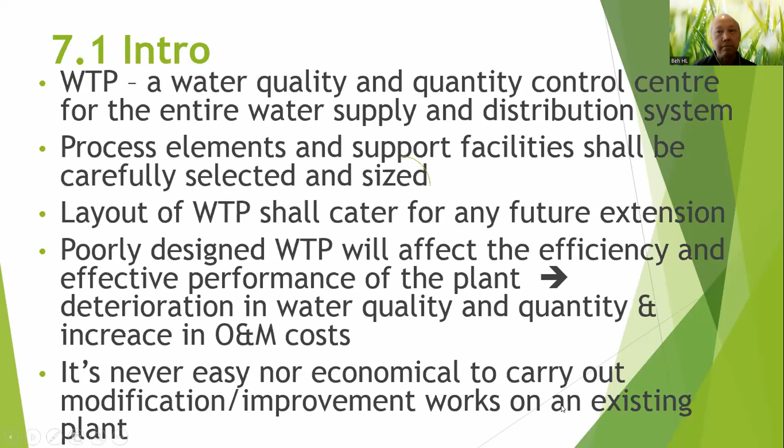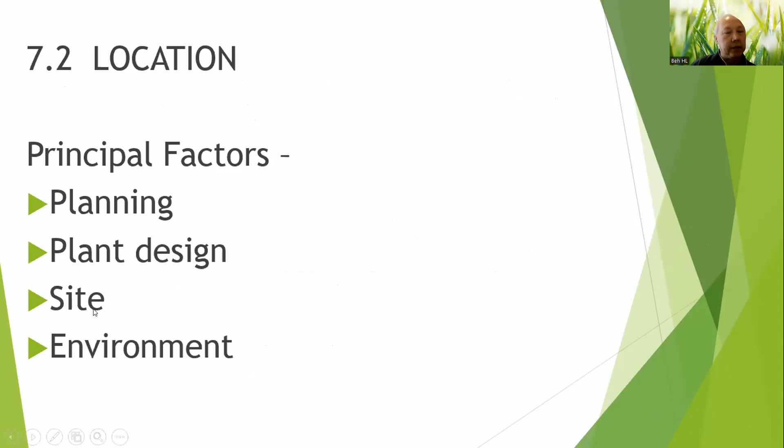Location of the treatment plant. During planning, these are the few principal factors we need to take into consideration when locating the treatment plant: the planning of the plant design, site selection, and the environmental factors.

On the planning side, this is a significant factor. The location should cater for the present and future demands, as I mentioned, and take into account the possible growth of the service area, which is the delivery area, and the potential deterioration of the source quality. Sometimes the raw water source could be in a region of fast development, and there could be a potential deterioration of the water quality. So in our planning, we have to allow for possible addition of future treatment processes to cater for that.

In trying to locate the treatment plant, we should look at the master plan of that area, if one is available. If there's no master plan, then we have to discuss with the local authorities, looking at any new application for developments, and discuss with the Ministry of Environment and other stakeholders as well.

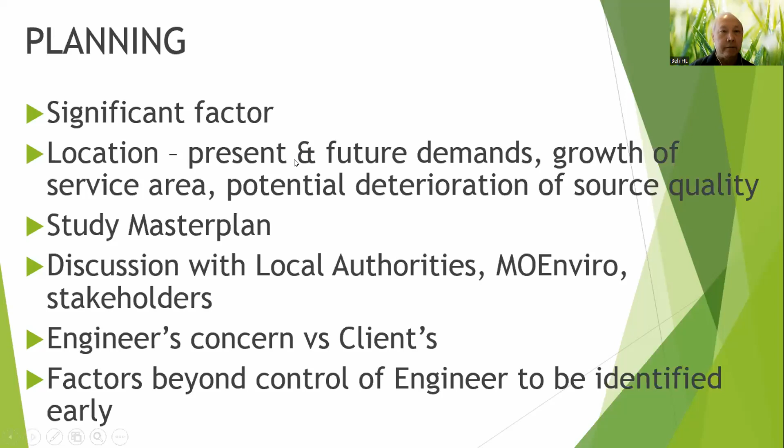The plant design and land selection has to consider various space needs. That means not only the layout of the treatment plant, but also during construction, the movement of construction traffic, storage of building materials, and so on. Also during operation of the treatment plant, the various space needs, like the transport of chemicals, and also the environmental requirements to be met.

The next thing is to prepare a preliminary layout. I remember those days we didn't have AutoCAD. I used to cut out Manila card - colored Manila card to the approximate size of a process unit, approximate size of admin building, chemical building, etc., and then try and lay them out to roughly get a feel of the size required.

We have to evaluate the potential site, looking at the topo map, existing constraints, etc. All these have to be taken into consideration. As I said before, the preliminary design has to include present and future requirements, to see whether any extension is required. And we have to bear in mind to include access roads, setbacks, and any possible earthwork, cut and fill, landscaping, etc.

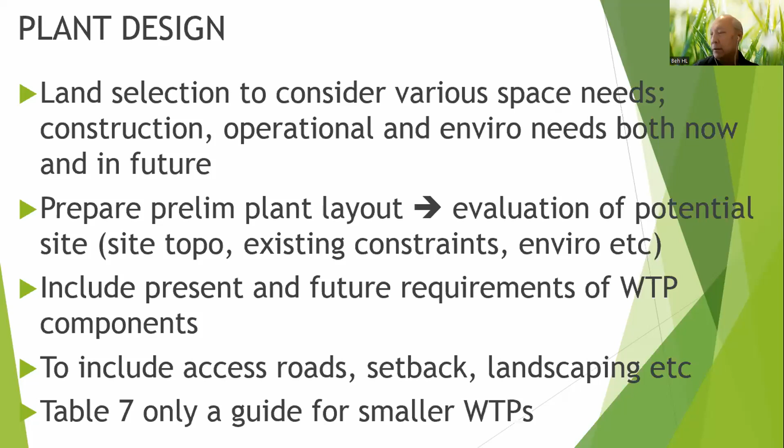It's my hope that somebody in the design committee can have a look at the latest development of big treatment plants and see what land area is required for those large plants, and come up with a guide that covers bigger treatment plants.

Site selection. There are a few factors to be considered, I think 7 or 8 factors, when we want to select a greenfield site, meaning a new site.

The relation to intake and service area: if you have your raw water source and your service area, the treatment plant can be located near the river or dam, near the service area, or somewhere in between. Ideally we prefer a shorter raw water main because it requires much more maintenance, due to slime growth, silt deposition, mussel formation, etc., requiring pigging and chlorination to disinfect if necessary. So preferably we locate the treatment plant nearer the raw water source and have a longer treated water main.

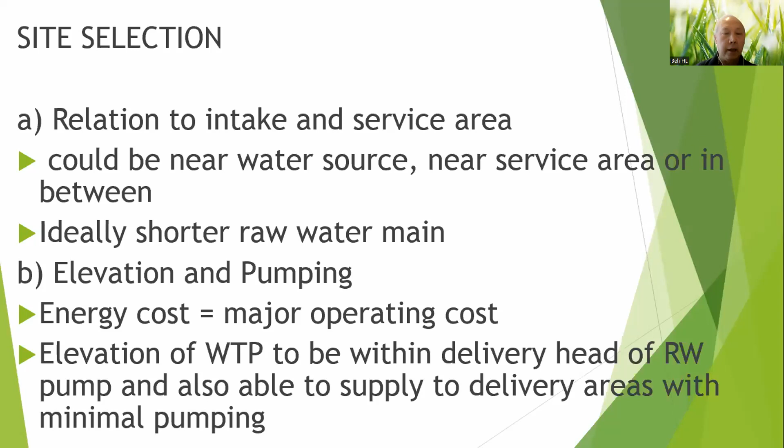The next point is elevation and pumping, because energy cost is a major operating cost. The elevation of the treatment plant has to be within the delivery head of the raw water pump, since for river water sources we normally use a submersible pump with limited head. The plant's location should also supply the service areas with minimal pumping - ideally gravity flow is best, but if not, minimal pumping is required.

Site topography: we should select a location where the slope is ideally between 2 to 8%, to suit the hydraulic profile of the treatment plant, since water flows from high point to low point. If the site is steep with a long slope, that requires extensive cut and fill to fit in the treatment plant. On the other hand, if it's very flat land, it also requires some cutting and filling to suit the hydraulic profile.

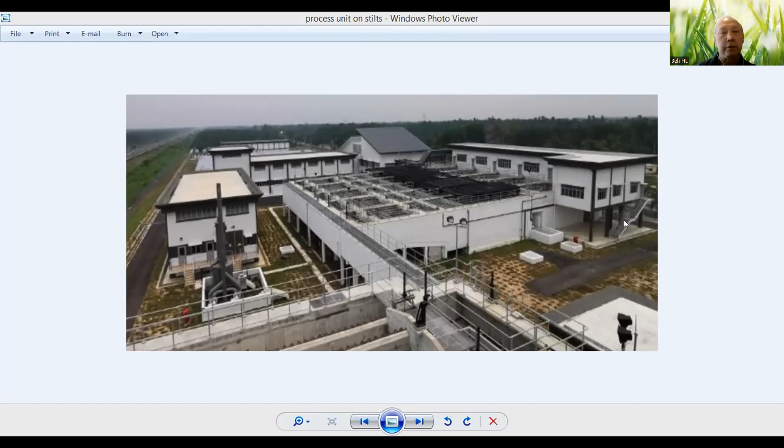Geotechnical is another important aspect to be looked into. Normally we will carry out some form of soil investigation and drilling once the site has been selected, to understand the subsoil properties, because any presence of rock will affect the cost of construction, or low bearing capacity soil will increase piling cost. High water table will require dewatering. All these increase construction cost, so it's prudent to carry out soil investigation on selected sites. This money cannot be saved.

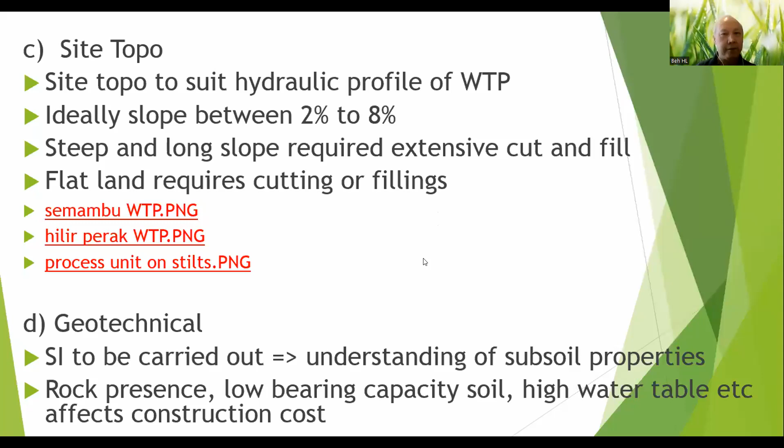Another factor to be considered is the possibility of flood. For a treatment plant, it may not be an issue if you select a high ground, but it still has to be checked to make sure it's above the 1 in 100-year flood level. If we don't have hydrological records, we can speak to locals nearby and learn from their experience where the maximum flood level is, or from visual inspection, look for watermarks to know the maximum level experienced.

Access is another essential consideration, because you don't want the treatment plant site deep in no man's land requiring long access to be constructed. If possible, it should be preferably near existing main roads so that construction traffic is more feasible. It should be accessible for construction traffic of workmen, materials, and equipment, and after completion, during operation, accessible for operating staff, trucks supplying chemicals, and treated residuals moving out of the plant. So when we select a site, we should look at the accessibility.

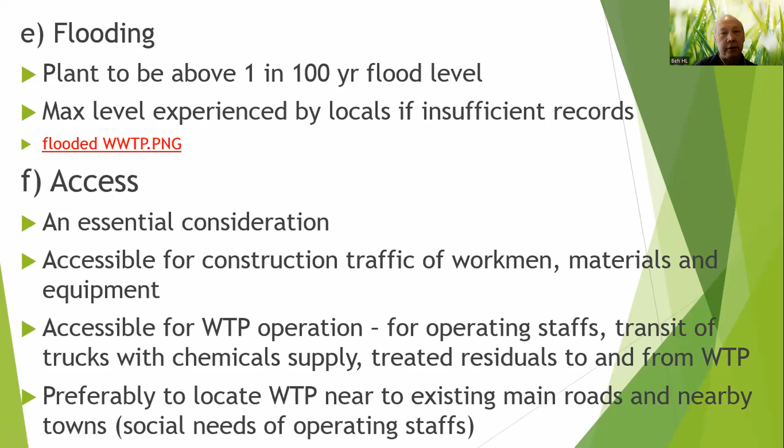Not only that, the plant should preferably be near an existing township also, so that the social needs of the operating staff, like schooling and rubbish collection, can be met.

Next factor to be considered is power supply and telecommunications. We should try to locate the treatment plant where power supply and telecommunications are available. For power supply, preferably we would need dual power supply sources. We would talk to the TNB, or in Sarawak and Sabah the electricity board, about tapping from two sources, so that if one side is down, they can still supply power from the second intake. Otherwise, if it's only a single source, we should look at generator backup, installing a diesel generator. We also need to decide how long the power outage will be, as promised by the power authority, so the generator size can be accordingly sized, whether to power the whole plant or only essential services.

Land availability: once all the requirements for a site have been established, we should check the availability of land and do a preliminary survey on the topo map. The potential site has to be inspected on ground, and we should select a site with the least land acquisition problems and costs. We should avoid land with multiple owners, because some land could have 5 or 10 owners, and if one or two refuse to sell, you have a problem with the land acquisition.

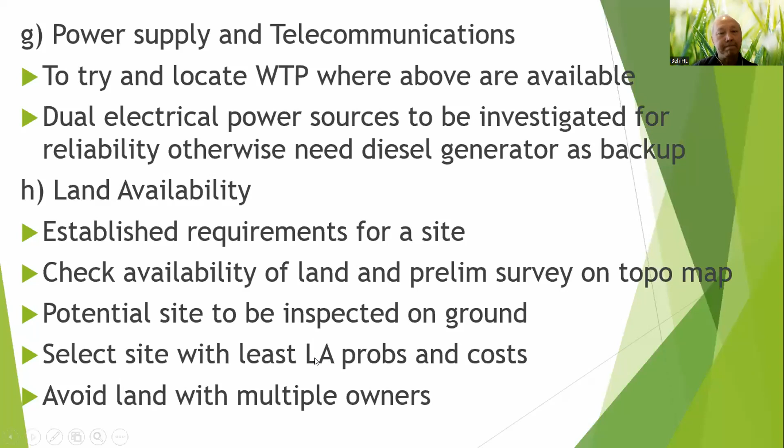Environmental factor: the EIA has to be carried out for the proposed treatment plant site, depending on the land size. DOE has certain requirements - below a certain size, an EIA report may not be necessary, but if it exceeds a certain size, we have to conduct an EIA study. There are various factors to consider, and I'll only pick the main points. During construction, we consider the noise of construction traffic, dust, and traffic movement. After completion, during operation, there will be noise generated from pumps, dust, and odor from chemicals.

We should look into the possible leak of chemicals, what dangers it can pose, and what contingency plans exist to contain them. The other thing to look at is the discharge of wastewater and residues from the plant. All these have to be included in the EIA report.

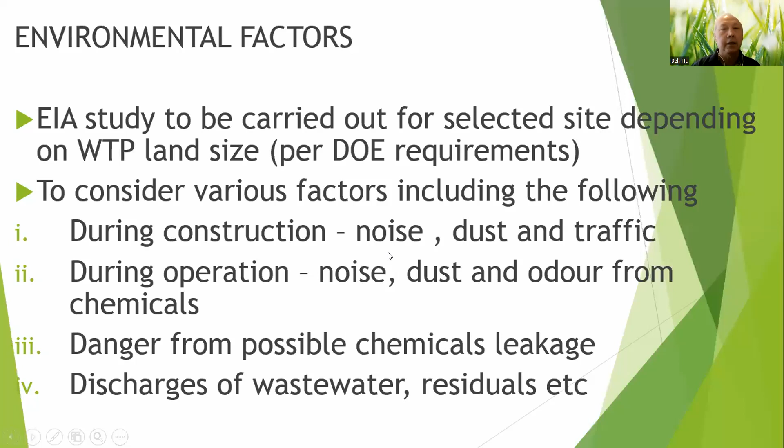The plant layout. In the plant layout, we should define the specific process elements, that means the treatment process units and all the other support facilities required.

Layout of the plant should be as simple as possible, with the minimal number of process units, but yet still able to provide sufficient standby capacity. That means you don't want to have too many clarifiers or filters than necessary.

So a typical treatment plant comprises the process units, which are the aerator if required, mixing chamber, flocculation channel, clarifiers, filters, etc. And then you have the clear water tank and your treated water pumping station. You have to consider storage for the wash water, required for backwashing of filters. And of course, you have the administration building, chemical storage buildings, and other M&E like electrical buildings where your incomer is, and your control centers, etc.

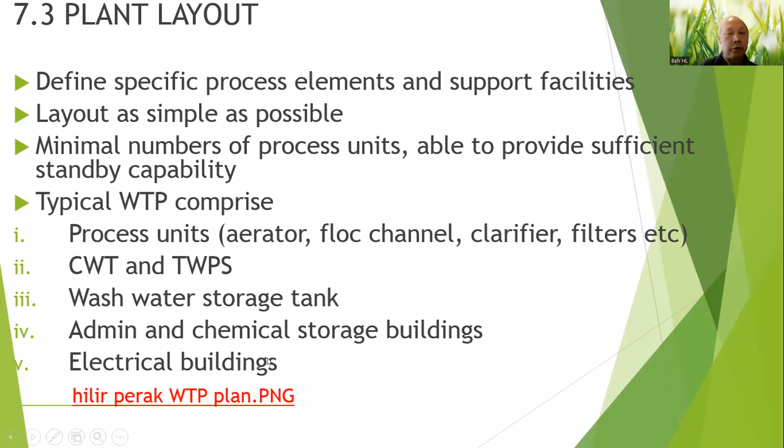So let me share this screen.

Arrangement of treatment facilities. In the treatment plant, it typically comprises a series of hydraulic structures, as I mentioned just now, all the hydraulic structures, and water flow lines or connection pipes, the chemical lines, chemical dosing lines, and your chemical preparation and dosing facilities. You have your M&E equipment for plant operation like pumping facilities, the electrical networks, instrumentation and SCADA in your control center.

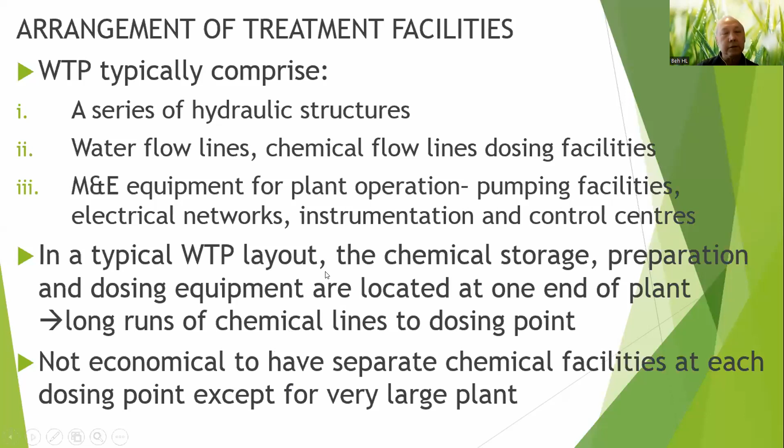So basic considerations for the plant layout are hydraulic design and connections. We should aim for gravity flow. I think mostly in the treatment plant, from the inlet to the clear water tank is all gravity flow, and all connections between the treatment units shall be direct and as short as possible to minimize head loss.

And once your hydraulic section has been determined, all the components of the treatment plant can be located within the site. Select your ground level so that you don't sacrifice any aesthetic requirements with minimal cut and fill. As I mentioned just now, if you have a flat site, then it requires modifications by some cutting and filling.

And for cut slopes, a rule of thumb is normally 1 to 1.5, and for fill slope, this is 1:2. These are just rules of thumb, and still need to be confirmed by the SI result.

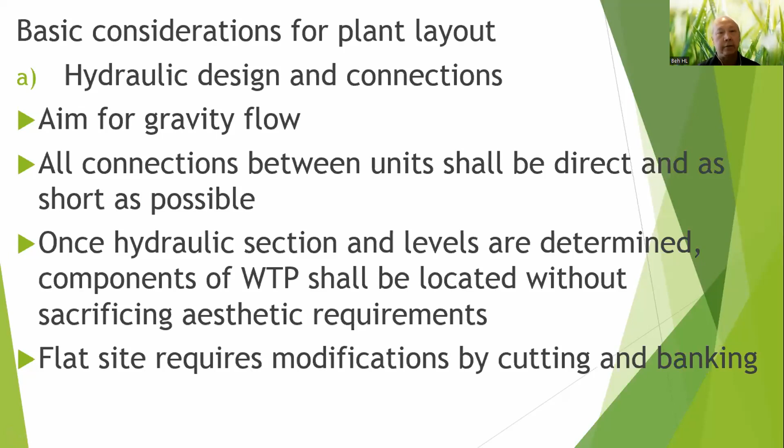Inspection, operation, and maintenance. We should aim for easy operation and O&M for the operators. When you plan out the treatment plant, you should have efficient operator movement.

That means areas requiring more attention, like your chemical preparation and dosing systems, your filters where you need to do backwashing, all these have to be located as close to each other as possible, and also near to the operation building.

If these areas are too far from the operation building, sometimes operators may be reluctant to go to the place often enough. So that may affect the operation.

The other considerations, there's a list of other considerations in the guidebook, but I think about 9 of them. I'll summarize them here to say that adequate access has to be provided. It means the walkway should be wide enough. You don't want too narrow a walkway.

There should be easy access from the ground to the top of the structures, like from ground level to the top of your clarifiers or filters. There should be covered walkways where possible, and external concrete steps or galvanized mild-steel ladders. I think now operators prefer concrete steps over ladders.

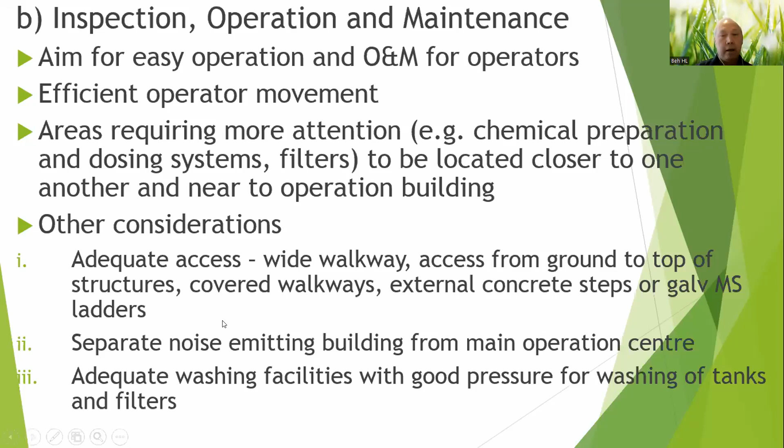Future extension. We have to consider the need for future extension, as I mentioned earlier. To meet future demand, we have to allow space for future extension if possible.

We also need to allocate space for additional treatment processes if we anticipate the raw water quality deteriorating in the near future. For example, if you foresee an increase in iron and manganese levels, we may have to allow for additional dosing of potassium permanganate or other chemicals to address this problem.

Chemical dosing lines should be as short as possible to minimize clogging. But as said previously, this is sometimes not possible as the chemical buildings are located at the other end of all the process units, so some lines, like to the aerator, could be quite long. We should design the route to be as straightforward as possible to minimize clogging.

The dosing lines should be arranged neatly in the trench or on trays. If it's in the building, it can be on trays; outside, between process units, it should be in a properly covered trench, and they should be properly marked or tagged for easy identification during maintenance. Generally UPVC pipes are preferred, except for lime, where operators may prefer clear plastic so they can see whether there's any clogging.

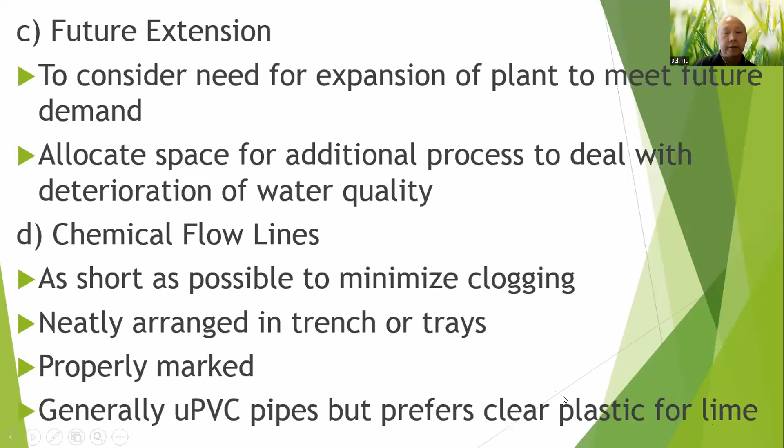Sanitary facilities. We have to provide proper and good sanitary facilities for the operators in the plant, and they should be designed to eliminate any potential contamination.

In the guidebook, it's still mentioned about soak away pits, but I believe nowadays most treatment plants don't use soak away pits anymore, except maybe in some very rural or remote areas in Sabah and Sarawak. So all these sanitary facilities have to be properly designed so there's no potential leakage or contamination of the water treatment plant.

Sufficient toilets have to be provided, one for each isolated building if possible. Places like the treated water pump station, the guard house, chemical buildings, etc., should have sufficient toilets. Of course, in the admin building there should be male and female toilets, and the number will depend on the size of the plant and the number of operators as well as visitors.

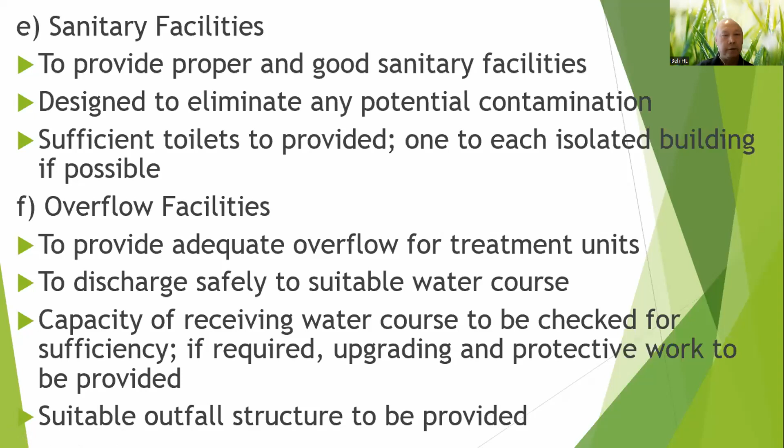External works design criteria. This is for the external works of the treatment plant.

The access roads. Access roads and service roads have to be metalled with a premix wearing course to standard JKR road design. The access road has to be a 5 meter wide pavement with a gradient not exceeding 9%. This is quite critical because chemical delivery trucks sometimes have difficulty climbing steep roads, and if the access road is designed too steep, they may not be able to climb the hill, or they may have to shed some load and do double work.

The main access road should have adequate grass shoulder on both sides. The service road inside the plant can be slightly narrower, at 4 meters wide pavement, with precast concrete road curbs on both sides. The minimum turning radius must be properly designed, stated as 15 meters in the guidebook, though sometimes more depending on the type of delivery truck expected to deliver chemicals.

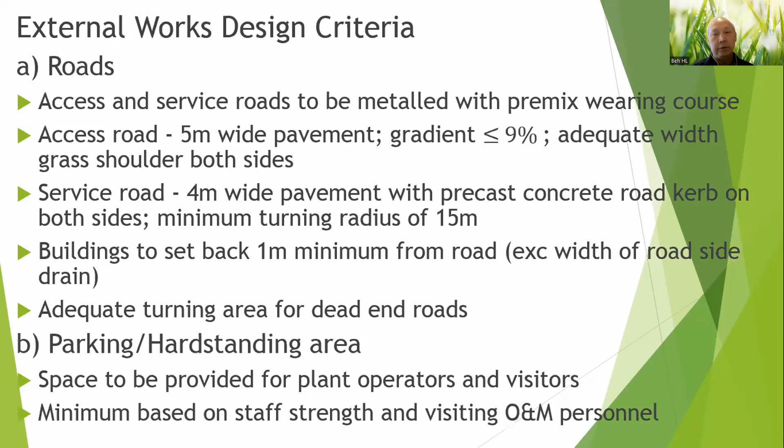Landscaping applies to all treatment plants. Criteria include close turfing on all open areas and cut and fill slopes. Previously, flat land had to be spot turfed and cut slopes close turfed, but now it seems we require close turfing on all areas.

Trees and shrubs on road shoulders, if possible, we should plant a lot of trees and shrubs on road shoulders to make things more aesthetically pleasing. I have some photos here, but stop sharing and keep sharing may take some time, so I'll probably skip some of the photos.

At the entrance of the operation buildings and around treatment facilities, it's also good to plant some flowering plants or ferns, but we must bear in mind to avoid trees that will have leaves falling into your process units. We don't want that to happen.

In front of the admin building, you should have at least 3 flag poles for the national flag, state flag, as well as the owner's flag.

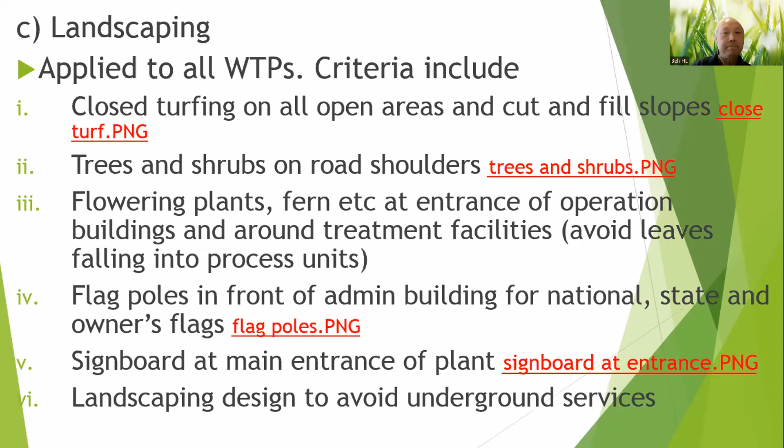Plant drainage: for surface water in the treatment plant, and also for overflow, all this has to be catered for. The wastewater flow, spillage from chemical trucks, and scour flows from plant facilities also has to be captured and properly drained away.

The precast concrete drain has to be adequately sized, and manholes have to be provided so that all this can be discharged into a nearby watercourse, retention pond, or sludge lagoon. The drains shall have a minimum size of 9 inches, which is 225mm, and a minimum gradient of 0.5%. A manhole has to be provided every 40 meters.

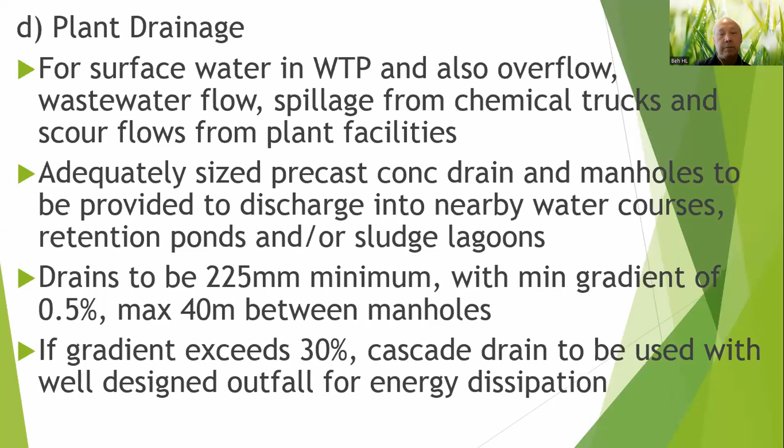If the gradient of the drain exceeds 30%, then a cascade drain has to be designed with a well-designed outfall. At the end of the cascade drain, you don't want the flow of water to scour the bottom part, so there has to be a proper outfall structure for energy dissipation.

A water reticulation system within the plant also has to be provided, so that you have water for use in the operation building, in the chemical facility for preparation of chemicals, and fire hydrants have to be provided as well.

This is a very controversial thing, because some will say that with plenty of water everywhere in your clarifier or filter, you can always dump a pump in and provide water for firefighting. But anyway, to satisfy BOMBA, we still need to provide fire hydrants and also washing facilities, and the operators' quarters need treated water as well.

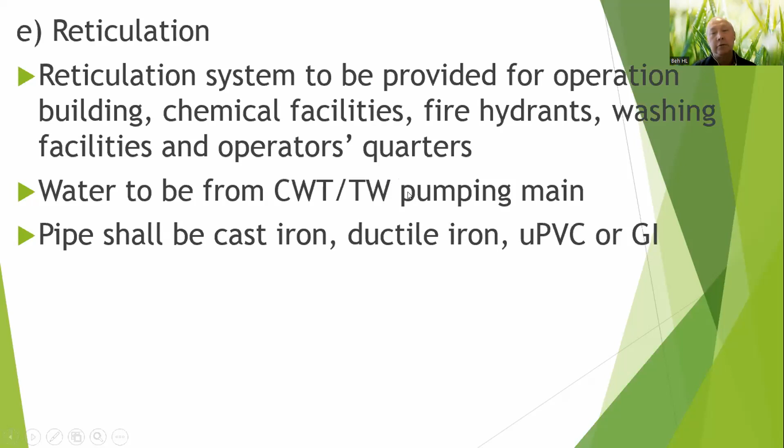The water shall be taken from your clear water tank or your treated water pumping main, and the pipe shall be cast iron, ductile iron, UPVC, or even GI.

Security and fencing: the treatment plant shall have a 3-meter high galvanized steel and PVC coated chain link fence. This is from the old guide. The new one may prefer some anti-climb fencing, which I can share here.

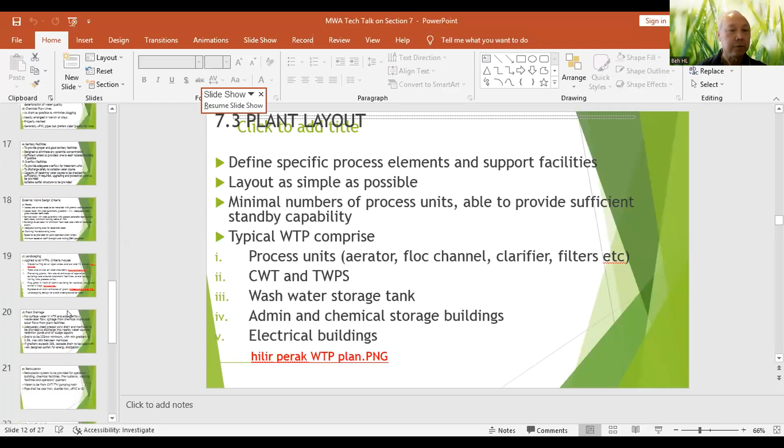Besides the fencing with barbed wires, we need a 5-meter wide main gate of chain link mesh or anti-climb fencing, and a 1-meter wide access service gate nearby the main gate. Sometimes you may not want to open the main gate just for person access, so you use the 1-meter wide service gate instead. If quarters are provided, they have to be fenced separately from the main treatment plant, but their fence height can be shorter, with only a 1.5 meter high chain link fence and a 3-meter wide access gate.

A guard house with toilet facility shall be provided at the main entrance gate, that's for sure. Other requirements may include a motorized gate for ease of operation, security lightings, CCTVs, as well as telecommunication with the guard house.

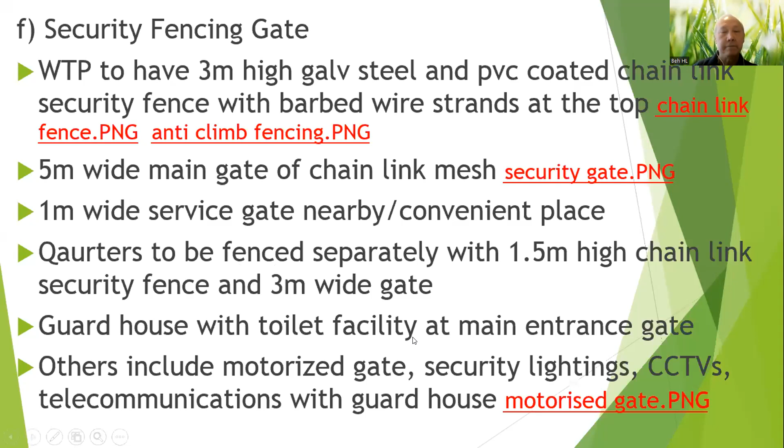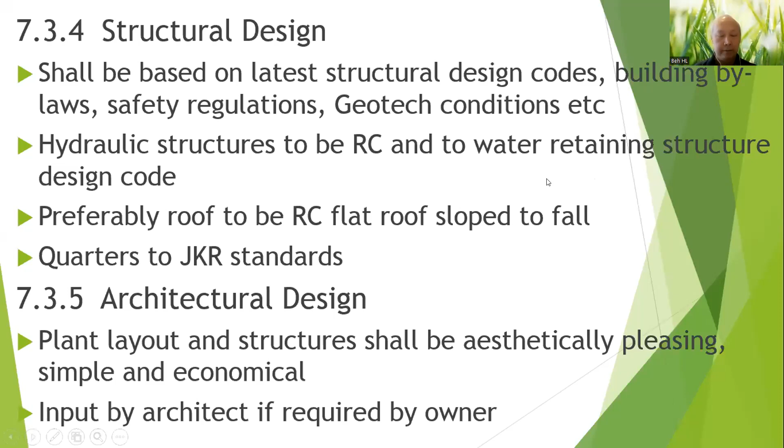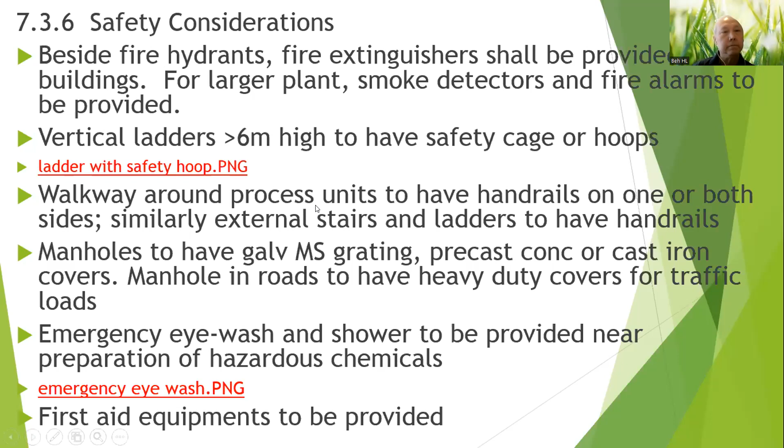Water treatment plant finishes: in the guidebook, there's a long list of types of finishes to be followed. Finishes have to be aesthetically pleasing, durable, easy to clean and maintain. The guidebook shows, for various locations, what should be the finish for the wall, the floor, the ceiling, skirting, etc. I'm not going to repeat all this, you can read it in the guidebook.

And the last thing to consider is the plant utilities, which is the water supply, as we mentioned just now, which should not be a problem in a water treatment plant.

Telecommunications now, I think most people are using handphones now. So besides the telephone or intercom, handphone is a convenient way of communicating.

Fans and air conditioning. In places of the operation building where people will spend a long time indoors, air conditioning should be provided, and also for temperature-sensitive equipment in your computer rooms. Whereas for other buildings where only occasional attendance is required, it may be sufficient to provide fans.